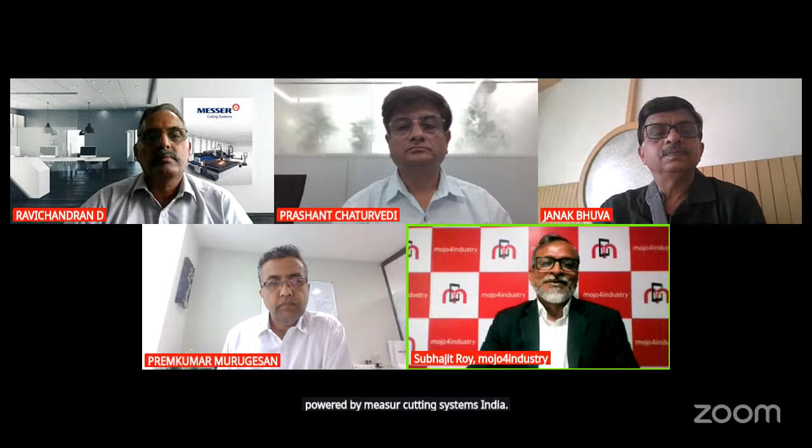One of the most important decisions influencing all these factors is the selection of the right plate cutting technology. Should you choose Oxyfuel? And when does plasma become the better option?

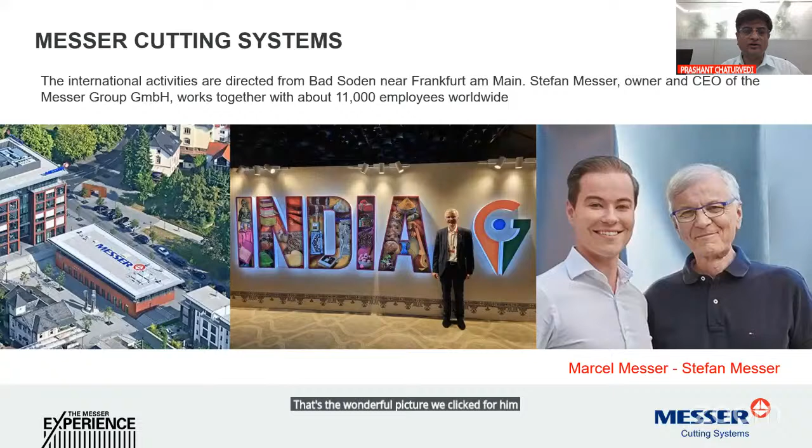This is how Cutting Systems is an owner-based company, presently owned by Mr. Stefan Messer. Last year, he was on invitation of the Prime Minister in India, and that's the wonderful picture we clicked for him. He came after a long period to India, and that's their office in Bad Soden.

As far as the world group of companies is considered, majorly they are a prominent player in China, Vietnam, North America in the industrial gases sector. Gases is one of the flagship companies with them, and they are into many industrial gases along with CO2 gas and many other related products, with many manufacturing locations and gas separation units worldwide.

Another company which the Group has is Spectron, which is into gas control systems - panels, high purity regulators, pipeline systems, and systems required for gas chromatography. This complete installation and high precision gas equipment range, generally called the high purity ranges, spans from industrial 4 purity up to 8 purity level of gases. All equipment and systems related to that are covered in Spectron.

Another division is what we call the OBU. Similarly, there is a US company called FlameTech, also owned by the group, primarily into the gas equipment business - regulators, torches, flashback arresters, heating torches, cutting systems, primarily based on gases. So the manual systems are covered under the OBU, and the US company for the same is FlameTech.

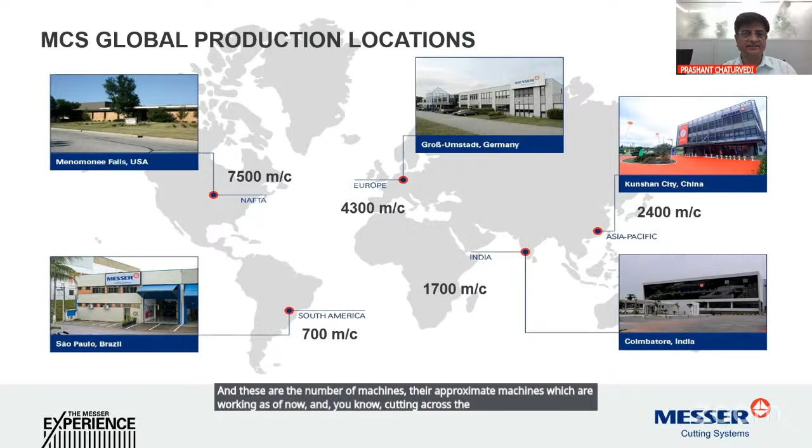And these are the number of machines. They are approximate machines which are working as of now, and cutting across the continents tons and tons of steel plates to make engineering components. There are wide dealer networks, service networks across the world which are placed.

And just a small story of MCS India operations: started in 2008, expansion in '10, another expansion in '11, and shifting to the new facility in 2013. And after that, another expansion into the laser plant, which was done in approximately 2017-18.

And I take this opportunity to extend a warm invitation to all of you. Recently, Subhajit has been to this plant, and I definitely vouch for that. In case you are traveling on a holiday to Ooty or you are on a business visit in Coimbatore, make a point that you have some 3 hours spare, and we would arrange a plant visit for you. And definitely you would be happy to see some systems and operations in place for this facility in Coimbatore.

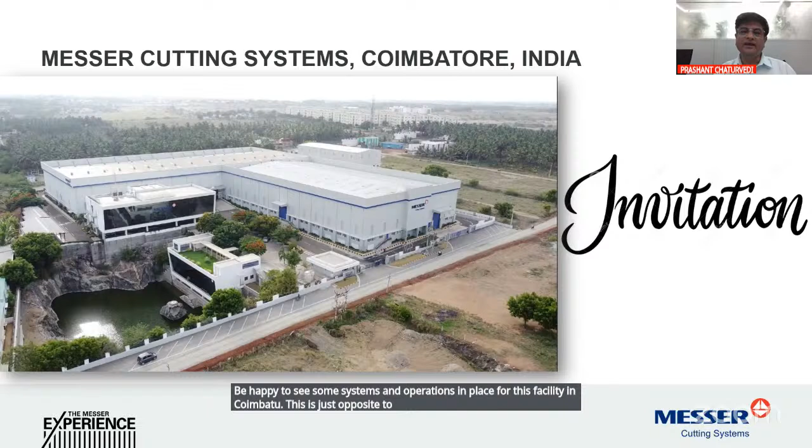This is just opposite the Larsen & Toubro Limited in the place called Malumichampatti. We have a complete gas cutting range as well under the same company, which is right from cutting torches, regulators, flashback arresters, gas nozzles, the gouging torches, the steel mill torches, and there are many more systems.

When you want to install, these days, the engineering companies do not want the gas cylinders. The gas cylinders that are the gases that we use in our plant, we call them, let us say, oxygen, acetylene, LPG, argon shield, nitrogen, helium, now hydrogen.

Even all these gases, the space the cylinder occupies is very important space in the plant. At the same time, there is a lot of movement of cylinders which inhibits the movement of the components. So as far as safety is considered, more and more people are opting that the gas cylinders be kept outside the plant into a controlled place.

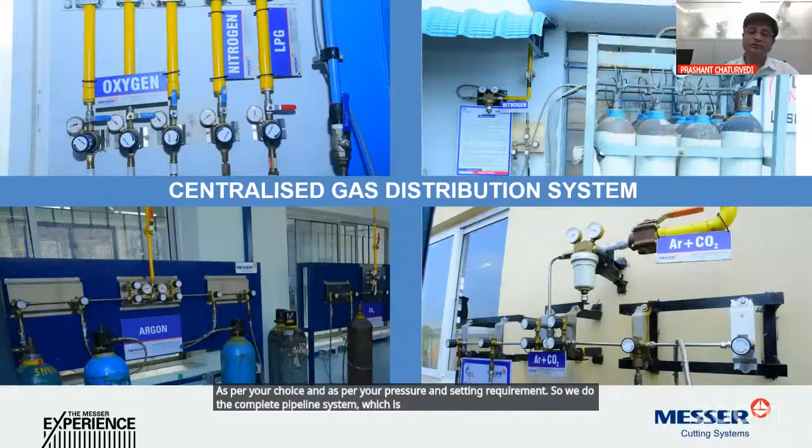At the same time, there would be a pipeline system running through the plant, and at the tapping points, you would be drawing the gases as per your choice and as per your pressure and setting requirement. So we do the complete pipeline system, which is an engineered one, along with all the safety process and regulations in place. There is a bunch of gas safety training programs that the organization, our team, conducts.

I strongly recommend that if you have these gases and equipment in your plant, engineering gases working, do write to any of the address or contact points in LinkedIn, website, email address that you have, and we would be happy to depute our expert trainers to conduct the free training program at your site or your plant. It's a very designed training program, and definitely will help you to increase the safety levels in your plant.

Gentlemen, now we come to the basics of the cutting process. We all know we have been seeing a cutting torch right across many decades or everywhere, right from a small street shop next to your place, which is doing maybe flame cutting. And then we have seen manual plasma cutting machines, and now we all talk of laser. In details, Mr. Ravichandran will take us through that.

But as you all know, in a gas cutting process, which we call the oxyfuel cutting process, it can be manual, the cutting torch that you see in the hands of a cutter or an operator, and you would see nozzles and a flame out of that nozzle. This flame would be either LPG and oxygen, or acetylene and oxygen. This flame is primarily used to heat the plate. Only MS can be cut by this process.

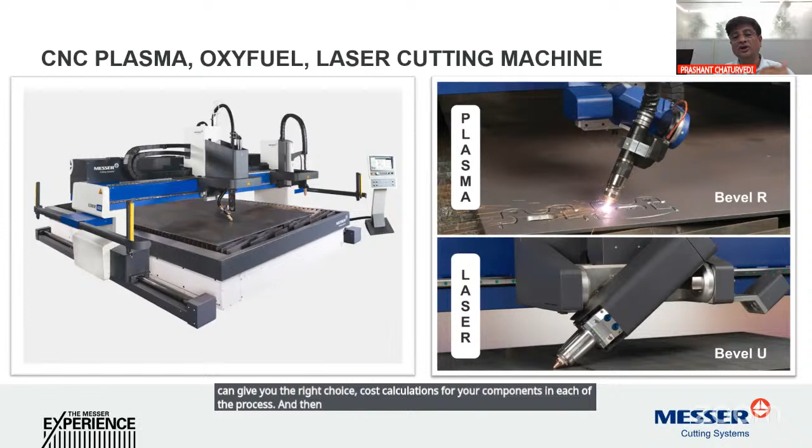So there are complete ranges, right from a small air blade which can cost 20 lakh rupees, up to the largest machine, as per your requirement, which can be given to you.

As we all know, in plasma, the basic one is air plasma. Then we enter the mid segment where we call it oxygen plasma, where we use oxygen as a plasma gas. And then comes high definition plasma, where we use mixed gases and the thickness increases, speed increases, and cut quality improves. These are high-end applications.

As far as plasma is concerned, we have two major partners for the plasma source, Hypertherm from USA and Kjellberg from Germany. So we provide the consumables, spares, and everything genuine required for this, along with the power sources as well, individually and along with our machines.

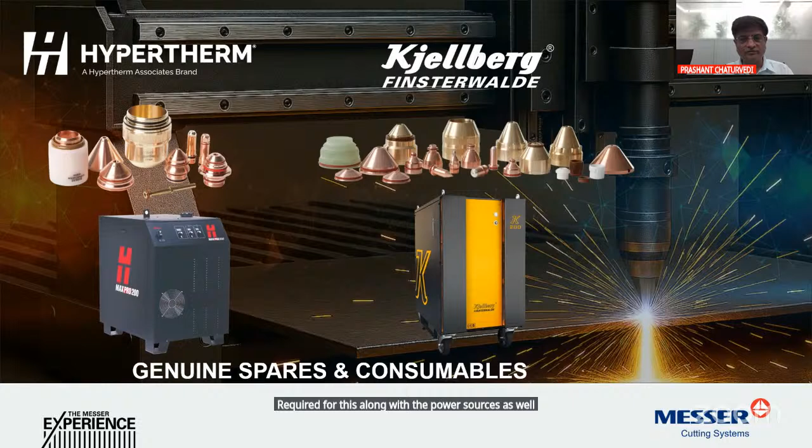We also do retrofit solutions, meaning you have an old machine, either Messer or some other make, but you don't want to discard that machine. You don't have capital budget, you only have revenue budget. So we can always work along with you and improve the productivity of this machine, improve the quality, change controllers, because many times the frame and everything are intact, so it can be upgraded.

Suppose you have used it for 6, 7, 10, or 12 years, and you feel it needs an upgrade in terms of productivity, quality of cut, or higher amperages, so the thickness capability can be improved.

All that can be done through our retrofit program. Just some similar examples we have done across. Every year we do approximately 30 to 50 old machine retrofits for our customers.

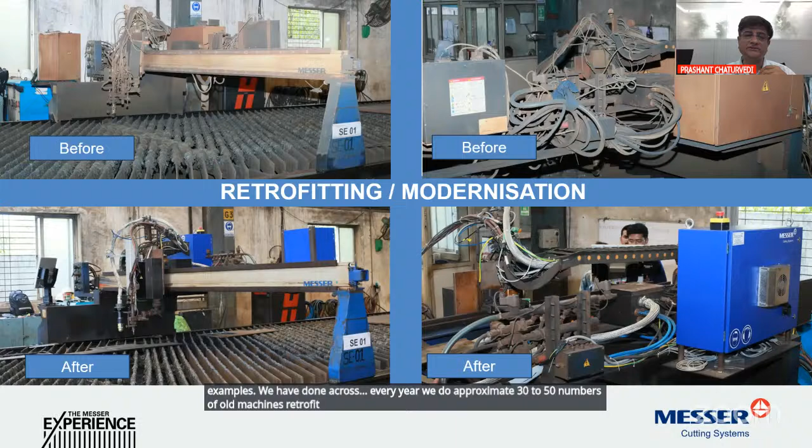Messer has a wide range of service teams, because these are mechanical systems working under harsh environments. The parts and components need continuous improvement or service. So we have AMC programs, service programs, retrofit programs, and a whole team along with our LCM managers who help you improve your performance and reduce your per meter cost of cut, improve your machine performance. Always do write to us.

If you still find that there is a gap somewhere, and you are already a Messer customer, do not hesitate, sir. Please write to us and we'll see that we correct ourselves and provide you the best services.

Just a few big names on the radar. Whatever I could include, we are humbled that we have all the major brands of the country, into big fabrication, on our customer list. And in the export region, since this region also covers the complete Middle East, we have many big names from the Middle East also as our esteemed and honorable clients.

So there is a relative selection of the process in terms of thickness, precision, cut quality. But I'll leave it here. From here onwards, Mr. Ravichandran will take you through the details of the process and how exactly we would do the selection. So thank you very much. This was my part. Over to you, Subhajit.

Thank you so much, Mr. Prashant, for introducing us to Messer Cutting Systems and sharing the company's vision of delivering advanced and diverse solutions to the industry. When I visited your facility not even 15 days back, I was thrilled to witness the work and R&D happening there, the employees, the resources. When I spoke to each individual working there, I found them thorough professionals. I'm really overwhelmed. Mr. Ravichandran was there too, so I could meet him. Thank you once again for the opportunity.

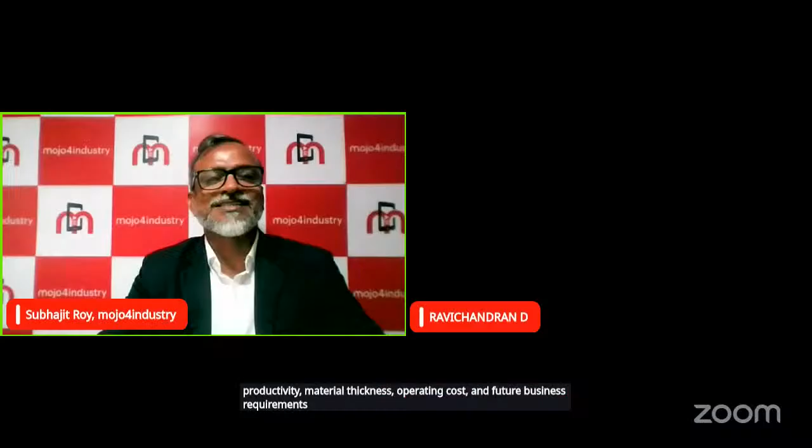So viewers, now that we have an understanding of what Messer does, let's move to the central theme of today's workshop: selecting the right cutting process is often a balancing act between quality, productivity, material thickness, operating cost, and future business requirements. To help us understand these critical selection parameters, we move to our next technical session.

Our next speaker is Mr. Ravichandran, DGM Application Engineering and ISD at Messer Cutting Systems India, who will speak on the topic of selection parameters between oxyfuel, plasma, and laser. Mr. Ravichandran has extensive experience in thermal cutting technologies and has worked closely with customers across various industries to identify the most suitable cutting solutions for their production requirements. In this session, he will compare the three major plate cutting technologies and discuss key decision-making factors. Please welcome Mr. Ravichandran.

You have to unmute yourself, sir. Yeah, sorry, right, thanks Subhajit. Thanks for the opportunity to express what is happening in the industry right now regarding thermal cutting technology. Let me share my screen. Please do that. It's visible, sir, you can go ahead. Okay, just a moment. Am I audible now? Yes, sir.

Yes, thanks again. I will talk about the three technologies, not on the working front, but about the benefits, limitations, and capabilities, so that gives you an understanding of what technology can be suited for each application, because the same application can have different parameters with which you view it. With the insight on the capability of the cutting technology, you can take a decision. Following that, I will also speak about the solutions Messer provides for each technology, and an overview of the products we offer for cutting.

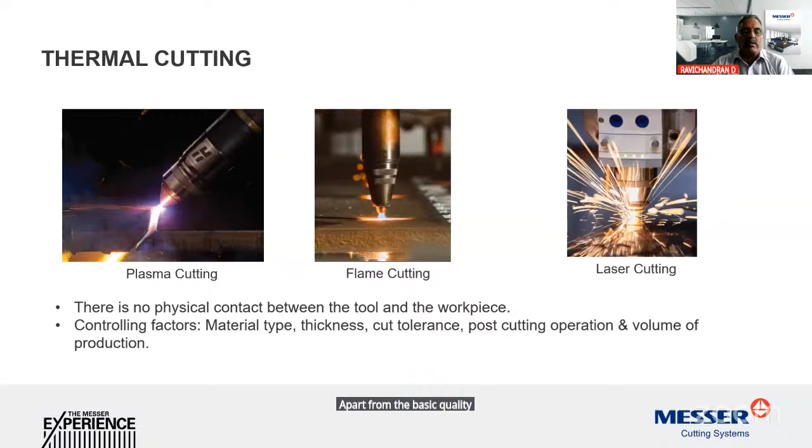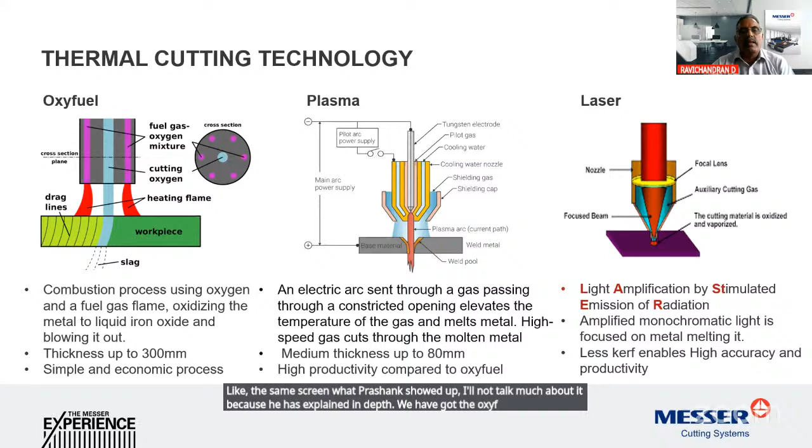Apart from the basic quality of each technology - like the same screen Prashant showed, I won't talk much about it since he's explained it in depth - we have oxyfuel, plasma, and laser. With oxyfuel, you can cut up to 300 mm, and in cases where you want more, we can go up to 450 mm.

When you cut closer, like if you have a hole, and the thickness of the material is 10 mm, you can only make a minimum 20 mm hole. When we talk of a minimum hole size, it means a perfect round surface can be achieved at a 1:2 ratio of the plate thickness.

Whereas in plasma, we can go up to 120 mm, and with very high definition plasma of 800 and 600 amps, we can cut up to 150 mm, but that will be a very edge cut. Generally up to 120 mm we can cut. The hole ratio is maximum 1:1, so if you have a 10 mm plate, we can make a minimum of 10 mm hole - that's even with high definition plasma, using a well-tuned and programmed machine that carries the plasma tool. So that's for plasma.

For laser, the hole ratio can be as low as 1:0.7, and in some rare cases it can go even lower. The thickness is restricted though, so maximum of 30 to 40 mm. The main advantage is fast cutting and low heat affected zone compared to oxyfuel. Plasma is still lower than oxyfuel, and laser is still lower than plasma. So these are the differences between the three cutting technologies.

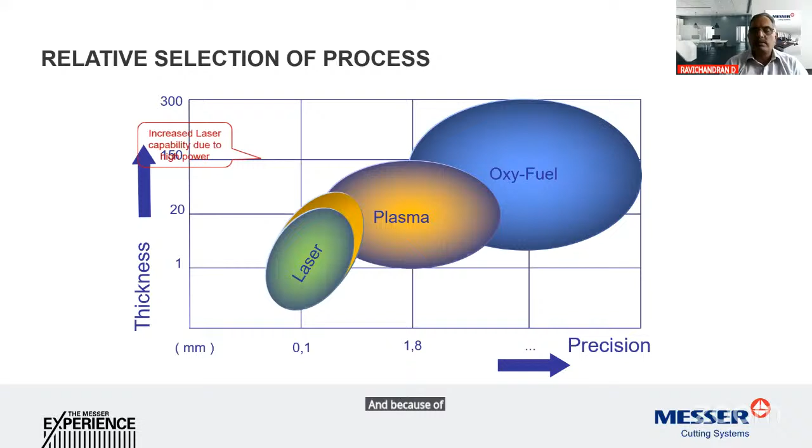What I mean by kerf is, when you have a plate and you cut it, the portion of material which is heated and blown away is called the kerf - the material we lose, which we don't have after we cut. That's on the kerf axis, on the thickness, on the top direction. So up to 25 mm you can have a better finish, and because of the advent of high powers, the laser still goes beyond that, up to 40 and 50 mm, but the quality is not as good as at 25 mm. That's why we've put a different color to that.

So it's developing fast - laser is fast developing when you compare the technology with plasma. Oxyfuel is already a proven technology, and not much development is happening on that.

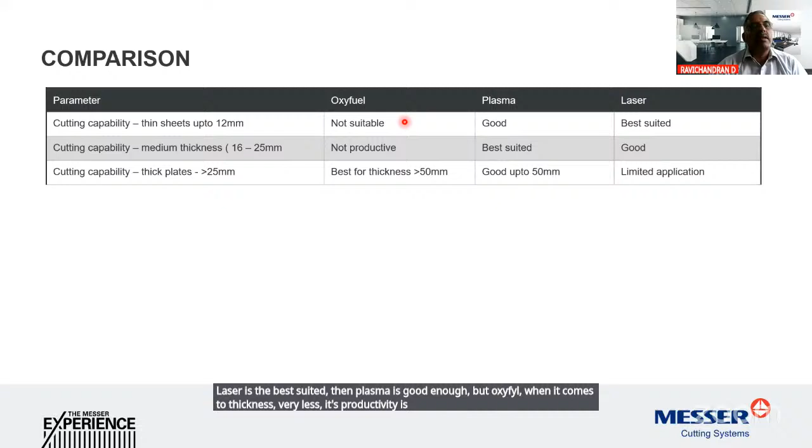Now comparing in terms of cutting capability: for thin sheets up to 12 mm, laser is the best suited - I'll just put a laser pointer. Laser is best suited, plasma is good enough, but oxyfuel's productivity isn't there when thickness is very low. When thickness is from 16 to 25 mm, plasma is best suited, laser is also good, but oxyfuel is still not productive. Above 25 or after 50 mm, oxyfuel is the best solution, plasma is good, but laser has very limited application.

So only up to 25, laser is good. This is the mantra in terms of capability of the technologies.

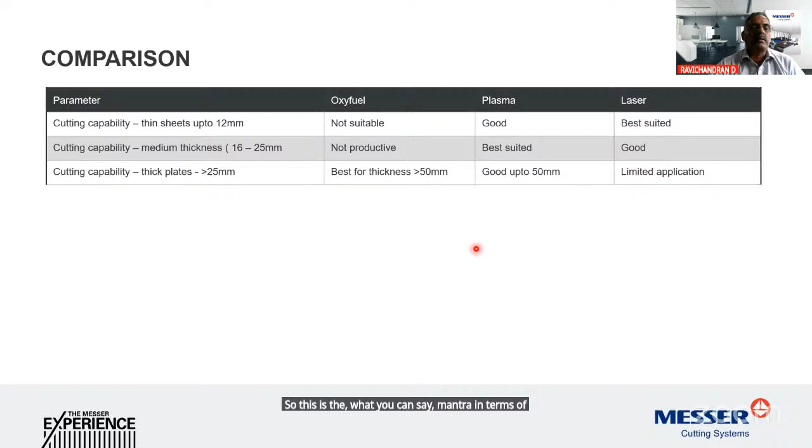Then the kerf, like I told you, for Oxyfuel we go up to 3 to 6 mm, whereas in plasma it's maximum 4 mm, even when you go for higher thickness. But laser is 0.1 to 0.5. It means more accurate, moderate, and less accurate. That's how we can define it.

And edge quality is good for plates up to 16. Good finish, very good surface finish, but a slight taper is there, which I will explain in the forthcoming, where the taper is also divided into 3 types of plasmas. So I will talk to you about that.

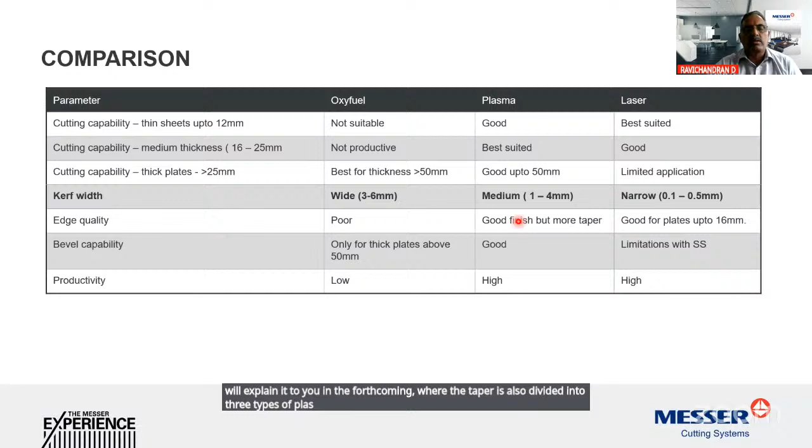And here edge quality is poor, meaning it will be straight, but still on the corners it will have a glowing effect. And bevel capability,

good with plasma, limited with laser, because we have limitations with stainless steel.

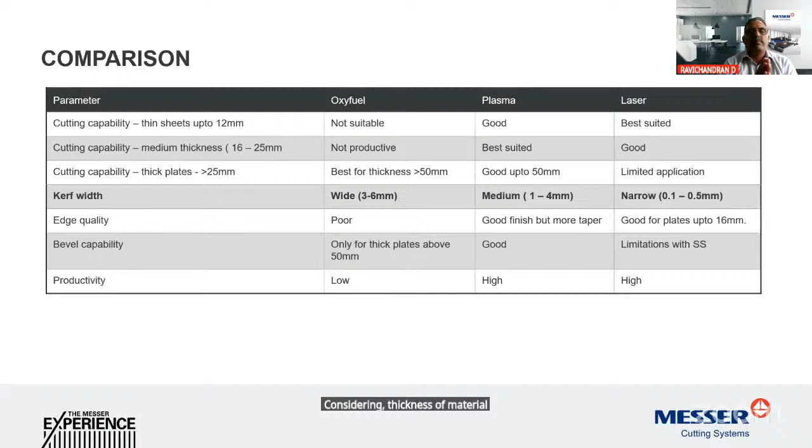Then coming to productivity, Oxyfuel is very low because the cutting speeds are low. Plasma is high, laser is high, but considering the thickness of the material, if the plate thickness is a bit higher than 10 or 16 mm, then plasma is the only technology which can cut material at high speed so that productivity is increased.

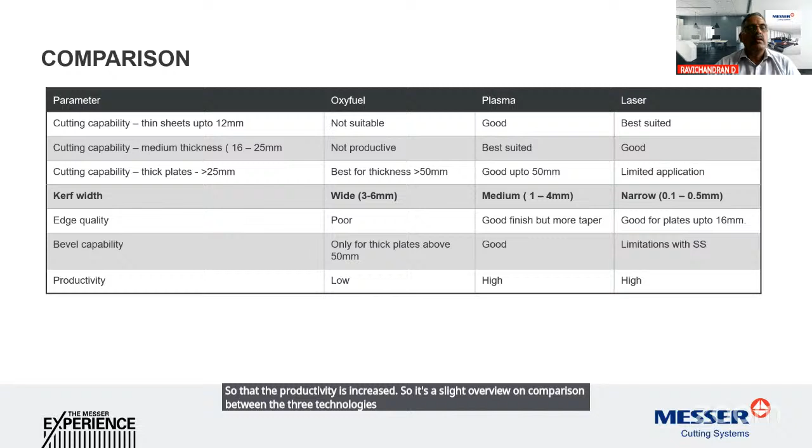So that's a slight overview on comparison between the three technologies. Now I will talk to you on specific cutting capability, cutting speed, and productivity across different technologies.

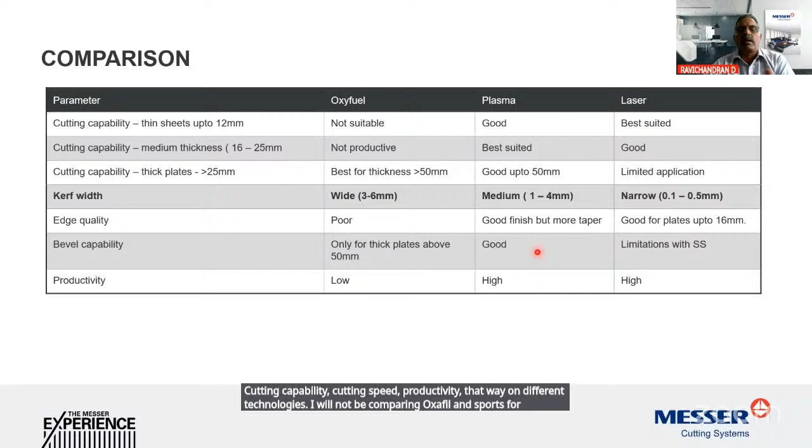I will not be comparing Oxyfuel henceforth for each comparison, because when you have a thick plate thicker than 50 mm, it's best to cut with Oxyfuel only. So most of the comparison happens when you have a plate cutting between 16 mm and 50 mm. That's where we want to have a real comparison, so I'll be mostly comparing plasma and laser, since those are the faster, high productive technologies used for cutting.

I have classified plasma into air plasma, oxygen plasma, and high definition plasma. That's how plasmas are classified, by virtue of how they are cut, what type of gas they use, and the technology. So we have got three types of plasmas.

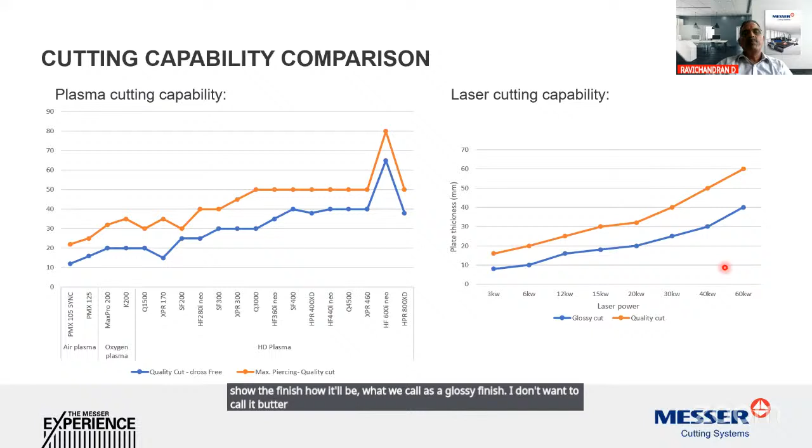And then when you go beyond that, maybe 40 or 60, which I think in India we have never experienced. Maybe this year we will be introducing the 40 and the 60. In that case, we can go up to 30 and 40 mm on a butter finish. I'll show the finish, what we call a glossy finish.

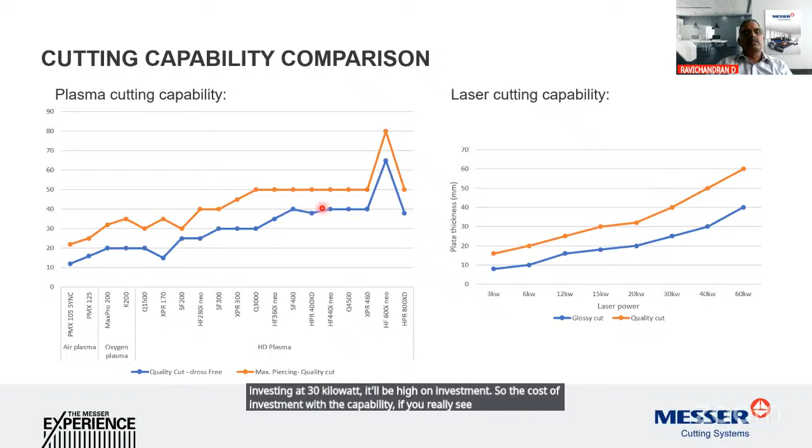I don't want to call it butter finish, but it's a glossy finish, more similar to plasma. But beyond that, whatever you cut in this area will have feed marks, but acceptable. There will not be any surface variation. So it's good, but still, when you want 25 mm and invest in a 30 kilowatt, it will be high on investment. So the cost of investment versus capability, if you really see, plasma is good for applications up to 25 to 50 mm, whereas here it's good up to 10 or 20 mm thick cutting.

But as the thickness goes beyond 6, to 10, both are similar from 10 to 16 - plasma and laser are similar to each other. When you increase the laser power, it matches with plasma. And beyond 20 mm, plasma is more productive.

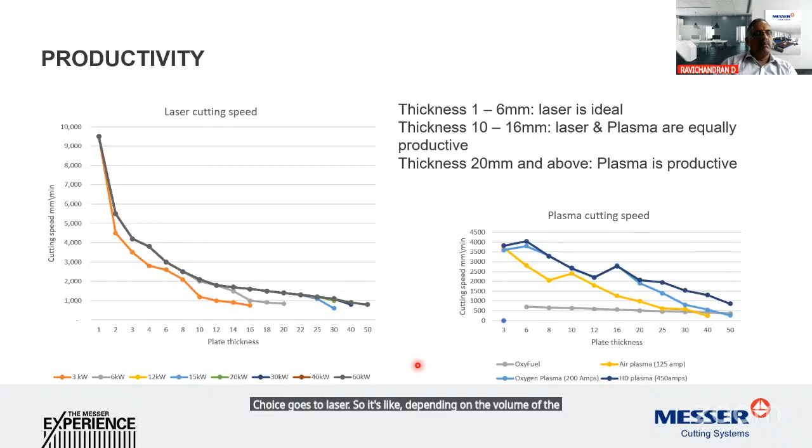So now coming to individual capability, finish-wise in laser - I've told you this is the maximum quality cut, and this is the maximum cut. So generally people will not cut in this segment, so whatever we are interested in is below this segment. So if you have a 20 kilowatt, I'm typically talking about mild steel cutting with oxygen.

We have two types of cutting technology for mild steel - one is generally oxygen, and since the high powers have come, now cutting with air is also taking popularity, so I will explain that too. But if you want a good finish, below this blue color line the finish will be glossy, with no feed lines - it will be very smooth. But beyond this, up to the quality cut, you will have visible feed lines, but the surface will still be smooth.

The taper will be within 1 to 1.5 degrees, or 2 degrees maximum. Beyond that is the maximum cut, where you have deep feed marks and a rough surface, which is not a desired cutting quality. So we should always look at whether you need a glossy finish or just a quality cut which can be used for fabrication. So this is how the cutting capability of mild steel with oxygen works.

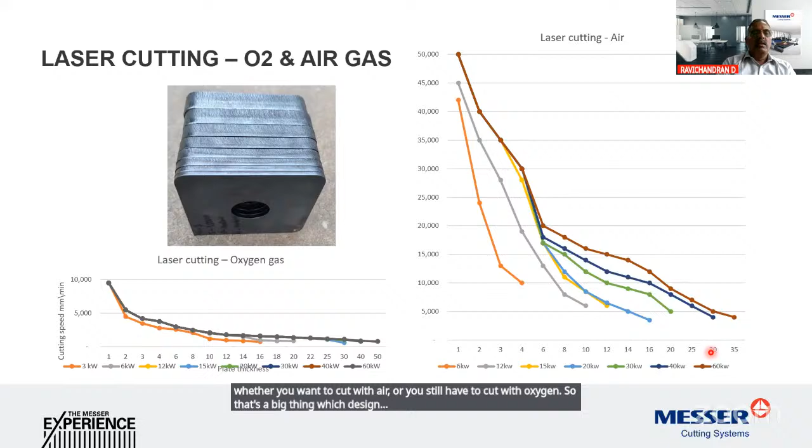But since you are going to use higher power to cut a lower thickness, your investment has to be higher upfront. But since the productivity increases, the ROI can be justified. So it all depends on the volume of production and the quality of the cut you need. That only decides whether you want to cut with air or you still have to cut with oxygen. So that's a big deciding factor if you want to cut with laser.

But this is a very coarse cutting. The quality cutting will be 40 mm for 300 amps and 50 mm for 450 amps high definition plasma.

And if you really see, the best part of plasma cutting is you have a smooth surface without any visible feed lines. But still, the kerf will be 1 mm, 1.2 mm to 3 mm for generally used thickness, and for maximum thickness it will be 4 mm. The volume of material blown out is higher, so what happens is on the edges, the bottom of the edges will be slightly rounded. That's the only disadvantage, but still the cutting quality will be good - the surface will be smooth.

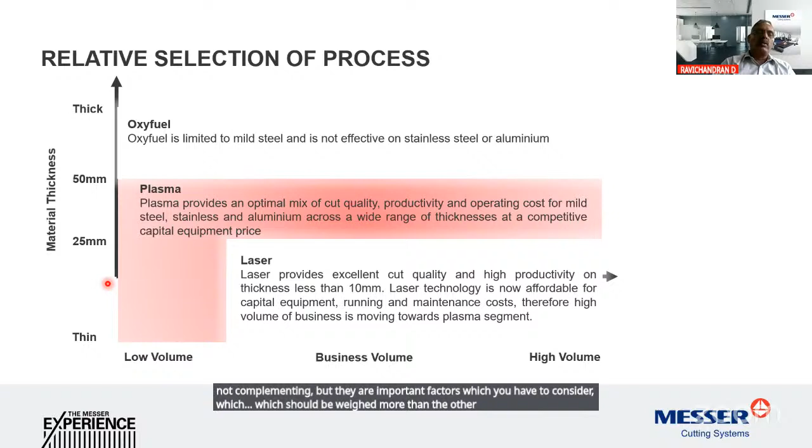On a relative selection, when you have thick plate cutting, there is nothing to dispute about - oxyfuel is the best solution. When you have plates from 25 to 50mm, it's better to have plasma. From up to 25mm, if up to 10 or 12mm, laser is a better solution. From 10 to 25mm, you can have a mix of either laser or plasma, because the justification depends on the productivity, the quality you aim for, or the investment you want to make upfront. All these factors are important and should be weighed against each other to decide on the process to be selected.

Laser is actually slowly dominating the market, but still, to give you an insight on the advantages of plasma over oxyfuel and laser, I'm just putting a few points to remind you of the benefits of plasma.

Plasma always has a better cut quality, and productivity is higher. The cutting speeds are anywhere between 2.5 meters per minute to 4.5 meters per minute, with lower cost per length cut compared to oxyfuel.

When you consider against laser, again, plasma has higher productivity for thick plates - say 10, 16, 20, 25mm - productivity is higher than laser. Using the same torch, plasma gives you a wide range of applications. Considering the investment, plasma's investment is lower, at least 1/3 the investment of laser. So there's lower capital demand for plasma but higher productivity.

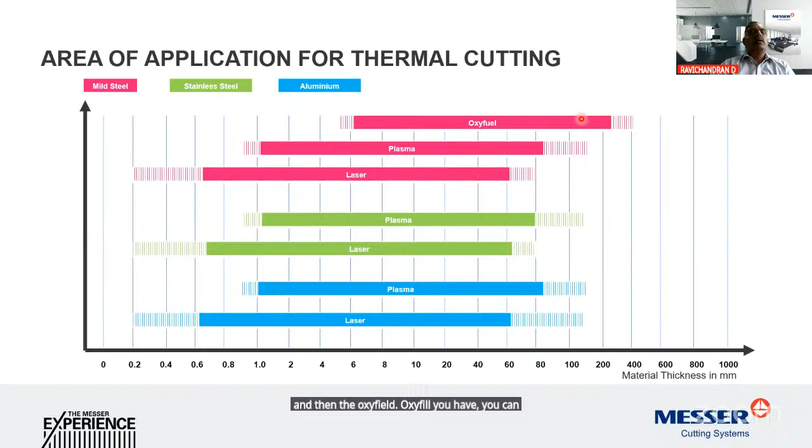Between plasma and laser, how do we choose? One factor is the workpiece or plates you want to cut, the part or output you want to get. If it has simple lines - if you're just cutting a square with 4 corner holes or something, or just making a cutout - then it's simple cutting, plasma is better. When stricter tolerances are there, small holes have to be made, when you consider plate-to-hole ratios to be very small and precise with intricate surfaces, then laser cutting is better. Thickness-wise, for more than 25mm, 30, 40mm, plasma is the best solution.

When you have thinner plates up to 6 or 10mm, then laser is the best solution. If you have a slot or inner contour, laser is better. Whereas if the quality of the inner slots doesn't need to be as good, then plasma is a better solution.

For reflective materials like stainless steel or aluminum, plasma doesn't have any effect - whereas with laser you have back reflection hitting the laser, so you have to be very conscious while cutting reflective material. But that's not the case with plasma, which doesn't have any effect when cutting reflective material.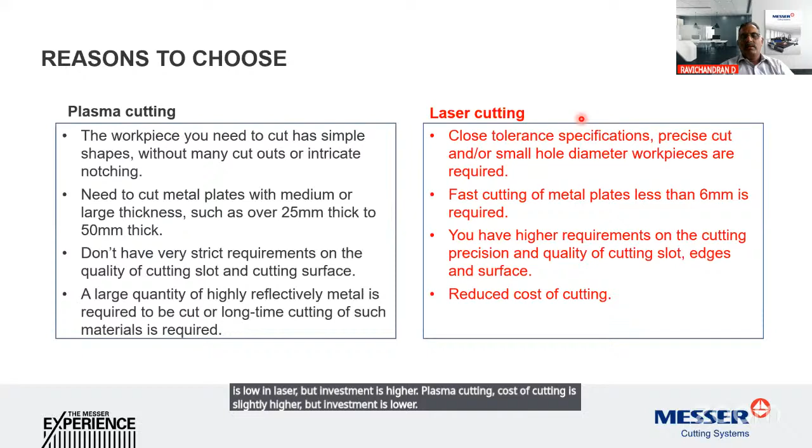Cost of cutting is low with laser, but investment is higher. With plasma cutting, cost of cutting is slightly higher, but investment is lower. So this way and that way, the technology works - these are the pros and cons.

Oxyfuel advantage: straight edge cutting, and for higher thickness it's better to use oxyfuel. Without piercing, it's better for edge cutting. Disadvantage: it's only used for mild steel - you cannot cut stainless steel, aluminum, or other non-ferrous materials. And it has very slow speeds.

Cutting is nothing more than 500 millimeters per minute. Normally it will be 150 to 250 when you cut higher thickness. If you're cutting thin material, say 3mm or so, it will warp because more heat is generated, so the heat affected zone on the plate is also more.

Considering plasma, it can cut all electrically conductive materials - we don't talk about any non-conductive material here, we're only talking about steel, so mostly these are all electrically conductive. And cutting speeds are higher.

Then ability to cut higher thickness also. Disadvantages: the kerf is slightly wider. So just if you see, this is the kerf.

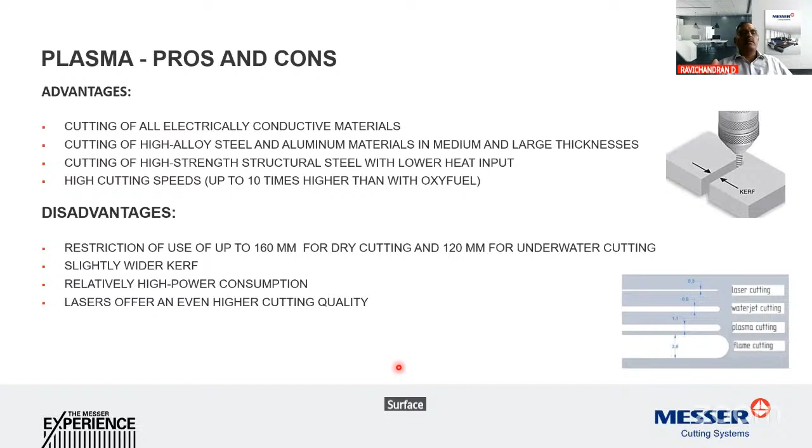This is what you get for oxyfuel, and then this is plasma, 1.2 to 1.8. Then laser is very thin, 0.2 to 0.4. Sometimes for higher thickness you get 0.5. So higher power consumption, because the power is used to ionize the gas, which in turn is going to cut the material.

So power consumption is slightly higher, and surface quality is always better for laser. And then for laser, advantage is when you want high precision or clean cuts, laser is good. And minimum kerf, so material or plate utilization is better than the other two technologies.

Disadvantages: when you have a demand to cut thicker material, it's really tough. And then it's more sensitive. Laser cutting is more sensitive. What it means is many factors like the power, the speed, the gas pressure, flow, then purity of gas, then the cleanliness of the optics, and the exhaust system where you take off the fumes. Everything has to be good.

And all the other factors, like what I told - the power, speed, gas pressure, gas flow, purity - and more than that, the focus length, height, all those, and the composition of the material also. All these play an important role on the cutting quality and speed, and they are more dependent on each other.

So it's not like you just reduce the air pressure or increase the air pressure and the cutting will be better. It's not that way - you change one parameter, then you have to fine tune all the other parameters. So that's a big disadvantage when you consider laser. That is not so with plasma and

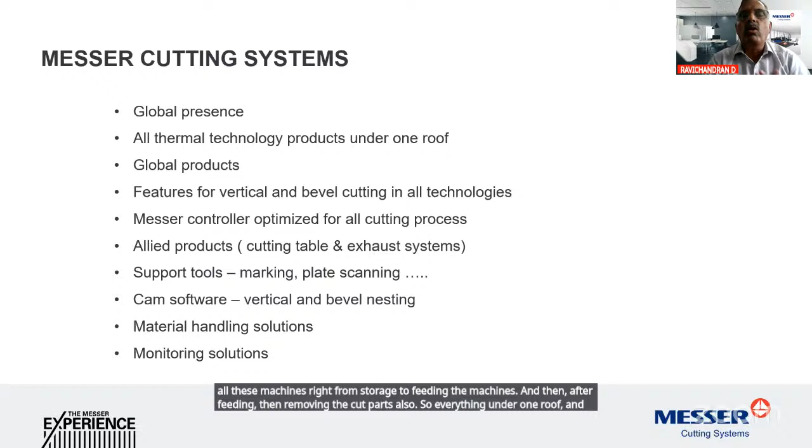Now, I talked a lot about the technology, and I will breeze through the products where these technologies are used. So first, we have the plasma and Oxyfuel machines. The lineup is like from air plasma up to a high definition plasma.

Air plasma is where you have a cutting taper of around 3 to 5 degrees. Those are mainly used for areas where the taper doesn't affect you much, and you don't have to invest more.

Like the PEB industry, and then for the fabrication industry, where the edges are not so important. So the starting is our Smart Blade, which is a machine typically made for ducting application. It's 3 meters by 1.5 meters, a drop and cut machine which can be taken to places where we have to manufacture the ducts.

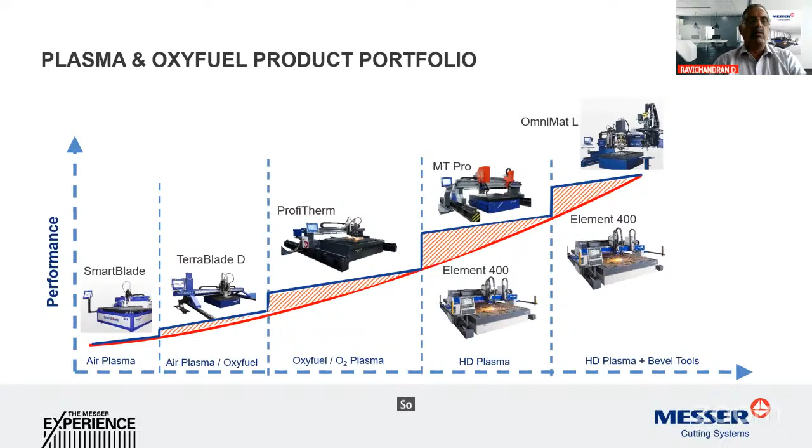Then the Terra Blade, then the ProfiTherm, then the high definition plasma used machines like the Sonic and the Element. So just to have one slide on each machine.

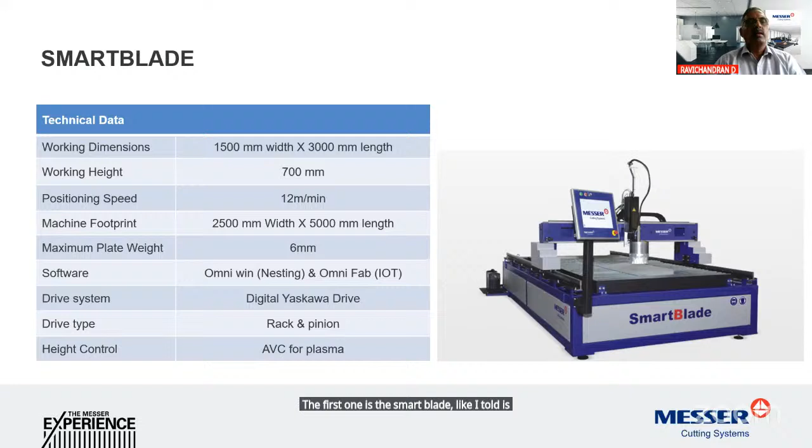The first one is the Smart Blade, like I told, this duct cutting machine. The next one is the Terra Blade for the air plasma application. Very limited sizes, cutting lengths of around 13 meters maximum, width of around 2.5 to 3 meters can be cut in this. Only plasmas up to 150 amps can be used.

So mainly this is suited for air plasma. Then the next is the ProfiTherm. This is, I would say, more suited for the fabrication industry, not heavy fabrication. Here you can use plasmas up to 200 amps, mostly the air plasmas, and also a few high definition plasmas.

So we have machines - these are more configurable machines. All our machines are highly configurable. You can have a cutting width from 3 meters up to 5 meters, and lengths anywhere from 6 meters up to 30 to 32 meters.

So you have a table, you can have a plate in the front where you cut. At the back, you have a plate which is already cut, where people can remove the cut parts and put a fresh plate. These machines are that type. This ProfiTherm is for applications up to 200 amps.

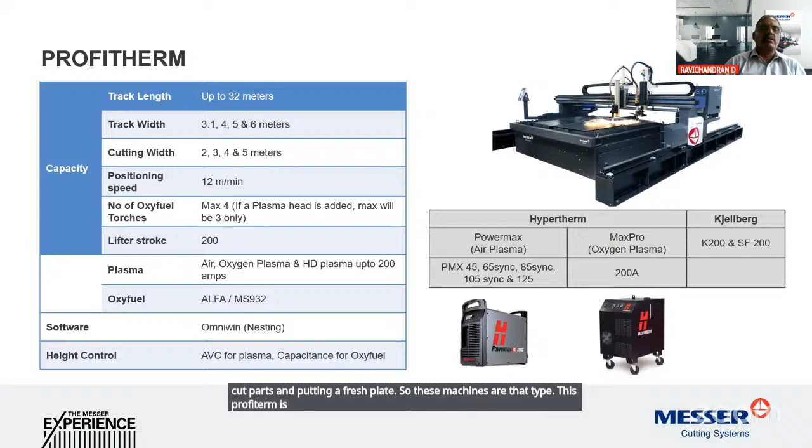The next one is the Sonic Pro. Here is a machine which has got cutting capability up to 460 amps and 600 amps also. Again, the same way, cutting widths up to 5 meters and lengths up to 32 meters.

And then comes our flagship machine of the non-laser machine. This is our Element 400, which is a high-speed machine with two configurations, either a maximum speed of 24 or 50 meters per minute positioning speed. So either way, we can use this machine.

All tools are available in this machine. We can use up to high definition plasmas. Then you can have the plasma bevel, not the non-TCP alone - we can have the TCP bevel also. And then we can have all markers - plasma marker, inkjet marker, pin marker can be used. Width is up to 7 meters and length up to 45 meters can be had in this machine.

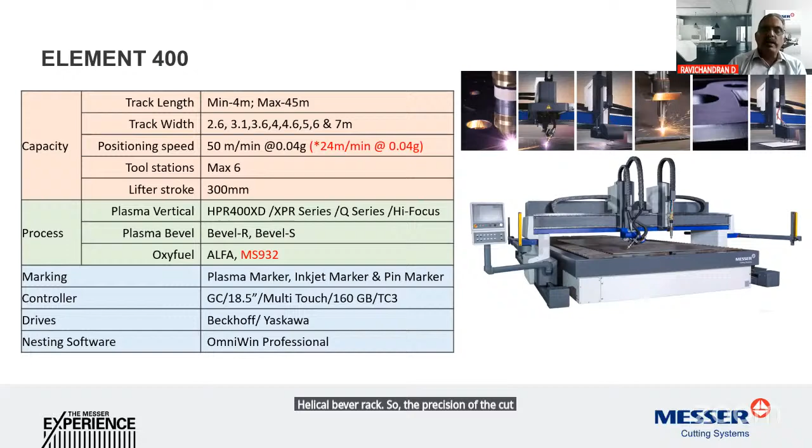And this machine typically has a helical bevel rack, so the precision of the cut parts is much better and the quality is much better.

So just to have a look at the video of the machine. This is the machine, with all safety included.

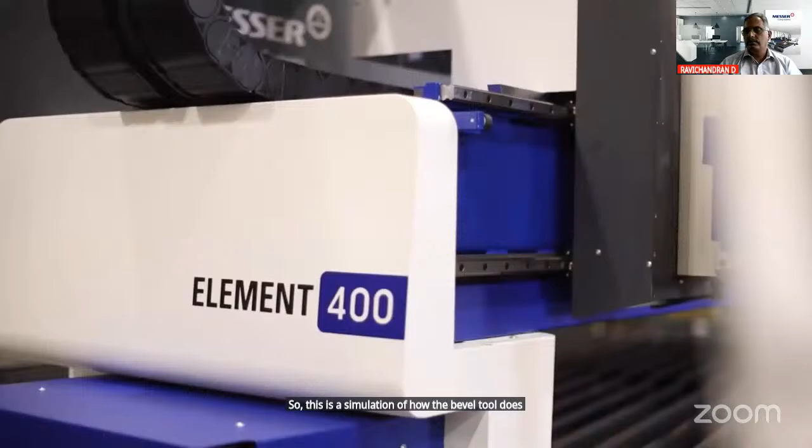So this is the last one. This is a simulation of how the bevel tool runs. This can be used for Oxyfuel and plasma.

I'm just moving it forward. So in this we have a manual bevel for the longitudinal transverse direction, and we can have the contour beveling application also, wherein we can bevel up to 45 degrees.

One thing is we can change the bevel while cutting also, so you can vary the bevel on the fly. That's an important thing which is not available in many competitors.

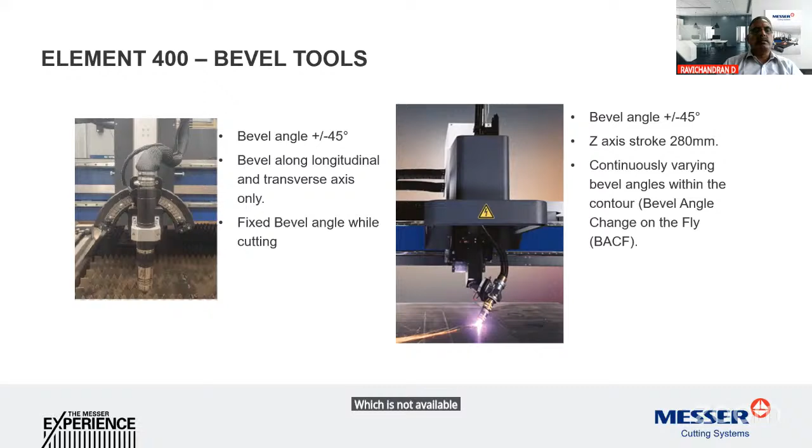I'll just run for a few seconds and then I will skip it. Generally we have a protective suit to safeguard the operator's life. We have just removed it to show how it works.

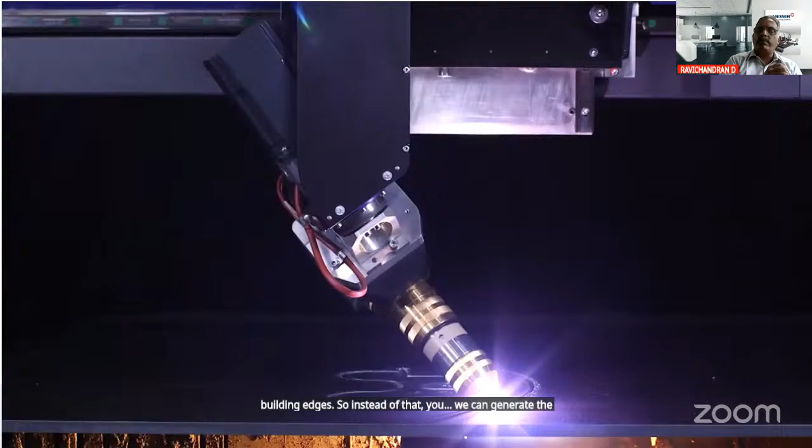So this is a TCP bevel. Your bevel quality and the accuracy of bevel increases. The advantage of this is whenever you have a weld preparation, generally you start with a heavy fabrication, you cut the part and then take it to another work center where you create the welding edges. Instead of that, we can generate the weld preparation right there while you cut it. So the time for cutting is reduced, and you don't have to have a secondary operation.

Then plasma options like Hypertherm or Kjellberg. This is all about the plasma portfolio. Then we have the laser product portfolio.

So we have got two types of offerings with laser: one is the standard format laser machines, and then the large format. Standard format laser machines are for cutting plates up to 3 meters by 1.5, up to 6.5 by 2.5. That's what we get in India.

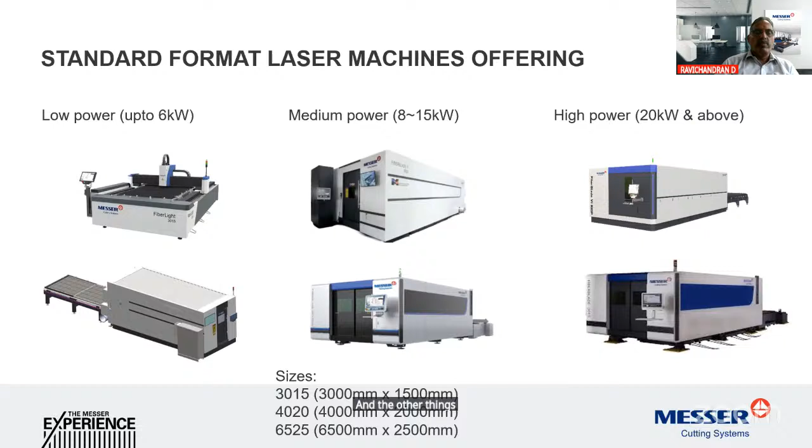So we have got three types of machines: low power, medium power, and high power. Low power machines can handle up to 6 kilowatt. The other one is 8 to 15 kilowatt. And the high power is 20 kilowatt and above, so 30, 40, or 60. Only on the low power do we have a single table machine, and the other ones are all enclosed and safe from radiation.

So low power is a bit deep dive into the specification. We have the machines of 3 meters by 1.5, 4 meters by 2 meters, and 6.5 by 2.5 meters. And plate thickness capability will be up to 25 mm. That's why we say this can be used up to 6 kilowatt.

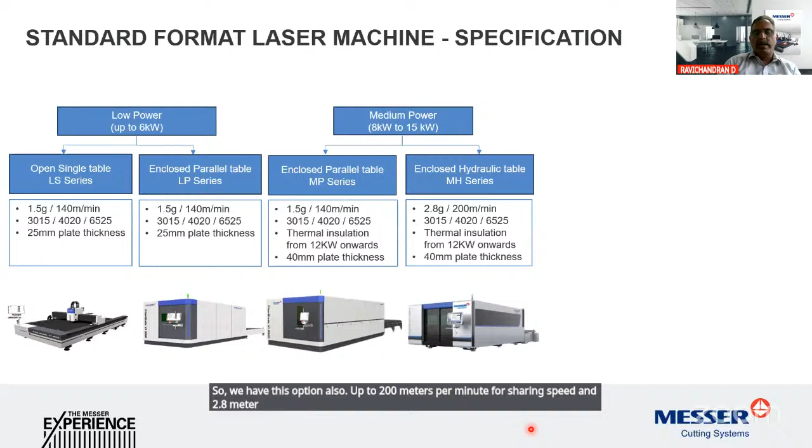The other one, mid power, is the same sizes, but the application will be up to 40 mm plate thickness. So it's a more sturdy machine. And we have two options wherein we can have an increased acceleration and increased speed also, up to 200 meters per minute positioning speed and 2.8 meter G rapid maximum accelerations on simultaneous. And then the high power, similarly here also.

But two major differences: the plate holding capacity is still higher, 60 mm. And these machines will have thermal insulations because when you are cutting at high power, heat generation is more, which tends to heat up the body structure. So that's the insulation which separates the body structure from the cutting zone, so the stability of the machine structure is not affected at all. That thermal insulation is available with the high power machine.

So these are the three various categories with the sizes on the standard format. Then a small video to show you how it looks like. I'll just run for five seconds and then take you to the next product.

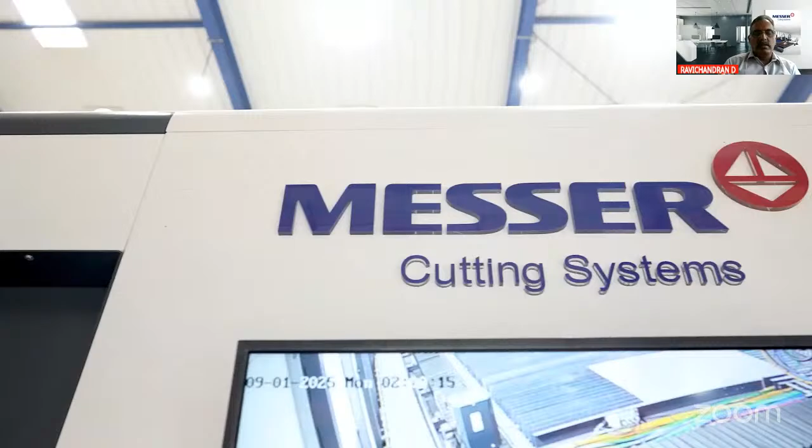So you have a machine fully enclosed. Then you have the shuttle table, various shuttle tables which take the minimum time for exchange. And in our laser machine, we have lasers of IPG, and others. And on the cutting head front also you have those options.

So I'll just run through. Large format is the next type of machines where we talk about cutting large sizes of plates. On the standard format, we have maximum plates of 3 meters by 1.5, 4 meters by 2 meters, and 6.5 meters by 2.5 meters. But for large format, if the cutting width or the plates to be cut are 2.5 meters and above, or the cutting length has to be 6.5 meters and above, we have bigger machines which we call the large format.

In the large format, we have got three types of machines. One is the fixed type, where the cutting width can go up to 4 meters and the cutting length can go up to 28 meters. So you have a fixed table where plates are kept put and you do the cutting, and laser powers can be up to 60 kilo.

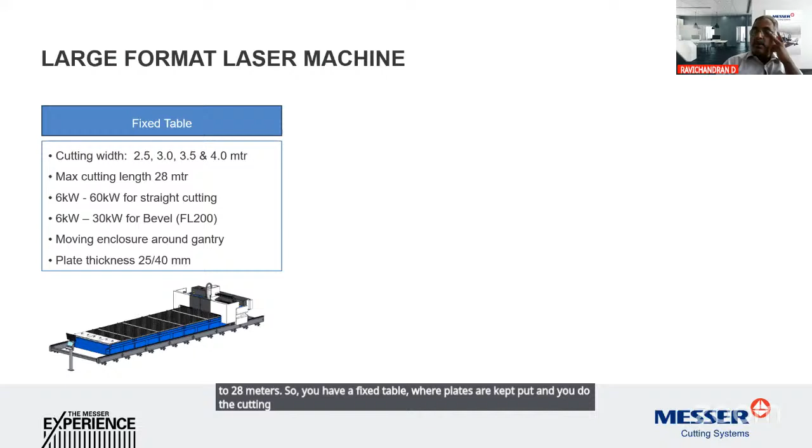And the next variant is, especially in the fixed table, you have a localized enclosure, which I will show in the next coming slides. And for parallel exchange table, it's like you have a shuttle table, but for a longer length than the standard format length, for 8 meters and 13 meters, and which can be from 2.5 and 3 meters. So you have a parallel exchange and a hydraulic exchange also.

One major thing is in these two machines, we can do beveling with laser also. That's a big thing because earlier what I told was on the plasma. Here we can do beveling with laser also. So this is a video for the large format.

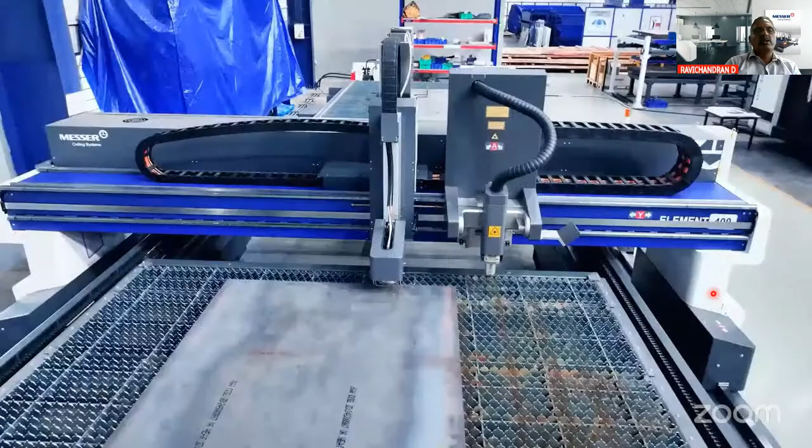We have not put the enclosure so that we can give you a better idea. This machine, whatever we are showing, that's our global controller.

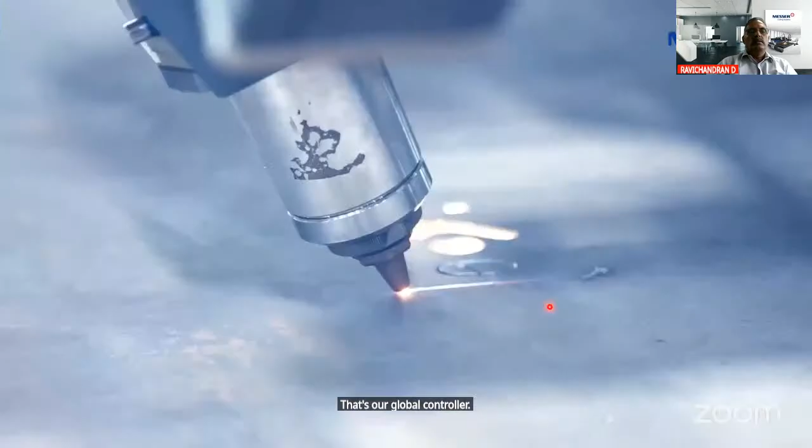I'm just skipping this and going on to explain the enclosures. So when you have a fixed table, we have two types of enclosures. One is for vertical cutting, which will be very compact.

And when you have a bevel, your tool is going to move around and then you need more space. So you have a bigger enclosure which also moves along with the gantry while you cut. And when you have a shuttle table, the whole cutting area is enclosed. So we have three choices of enclosure for the machines, which can be considered based on the investment also.

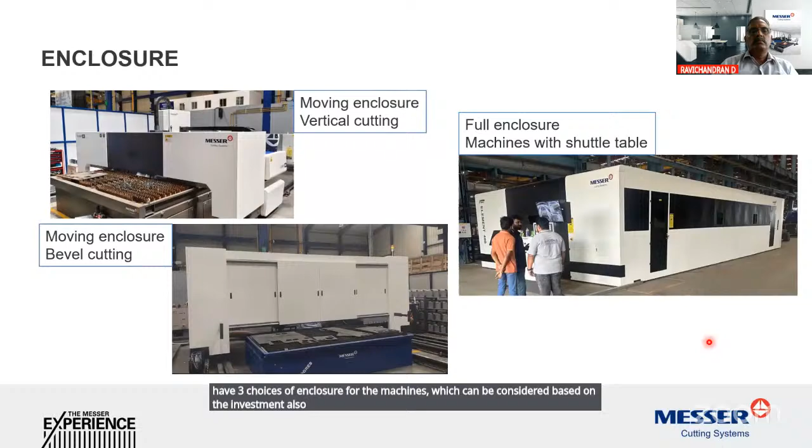And next important thing is the laser beveling. Here, what we proudly boast to say is our bevel tool cuts up to 50 degrees, whereas all the bevel tools across the world cut maximum up to 45 degrees. Ours cut up to 50 degrees, plus or minus 50 degrees.

And this is the cut quality what you have seen. I don't want to talk much about this, so this is a video to show how it cuts.

So this is beveling with laser. What happens is minimum wastage of material and accurate beveling can be achieved. This is particularly for mild steel. We have challenges with stainless steel where the limitations are there because of the pressure of gas being used. Higher the pressure, we will not be able to get a better edge quality during beveling.

So this is to just showcase the cutting capability. When you cut with oxygen, you get the glossy finish I was telling about. And then for quality cut, you will have some feed marks. You can see some feed marks, slightly feel it, but the surface is good.

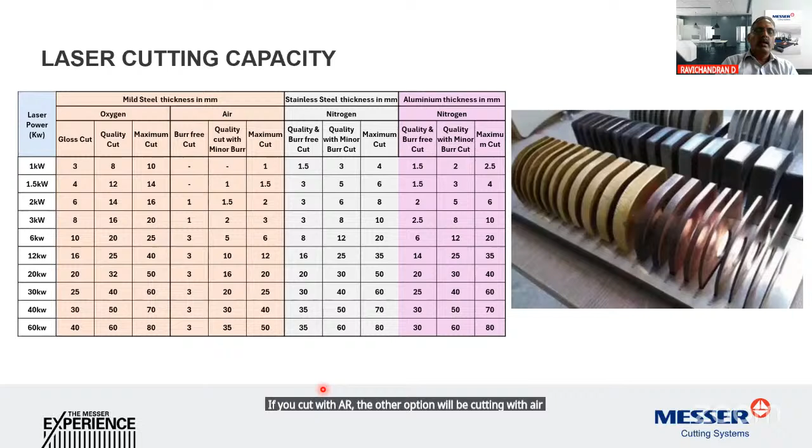Mild steel you can cut with oxygen and also with air. Stainless steel is better to cut only with nitrogen, and aluminum also with nitrogen, because if you cut with air, oxidation will happen on the cut surface. So this is the quality of cutting with oxygen.

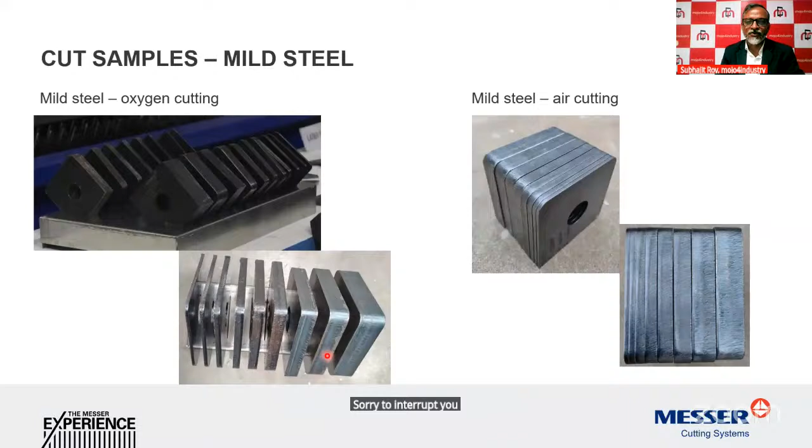Sorry to interrupt you, sir, could you quickly sum it up, because we have Mr. Janak also in pipeline. Okay, two minutes.

So all our machines are controlled by the Global Control, wherein we have the best thing. One important feature is job queuing, wherein we prepare everything and keep it ready, and the operator has to just press the start button to perform the next operation. So these are all about our plasma and laser cutting machine.

I would just want to not talk about the material handling, because this session is mainly on the cutting technology. Thank you.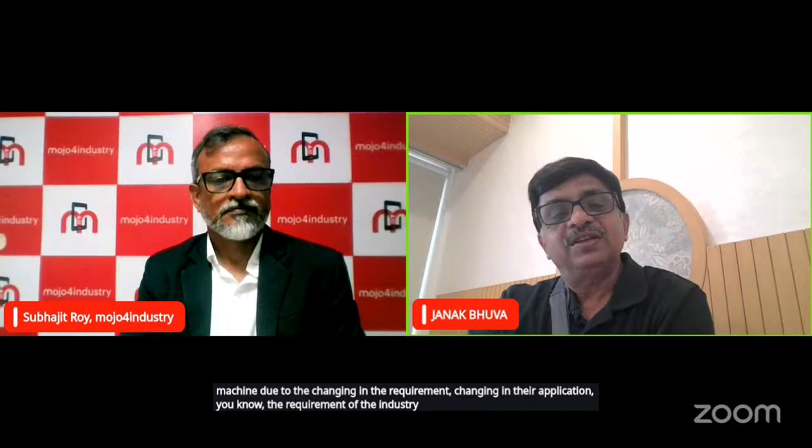This particular laser cutting machine is 12 kilowatt with a shuttle table of about 2.5 by 8 meters. They are mainly in crane manufacture and construction equipment machinery, and they can cut thickness up to about 22mm. Their profiles are mostly suited for laser application.

An interesting point: it's not that plasma is out and laser is the only option, or laser is out and plasma remains. This customer placed the order for both plasma and laser together. So you can understand how they select the machine for their application. Some components of their overall product go to the laser, and some go to the plasma, then they combine both to produce their product. That's how they go about it.

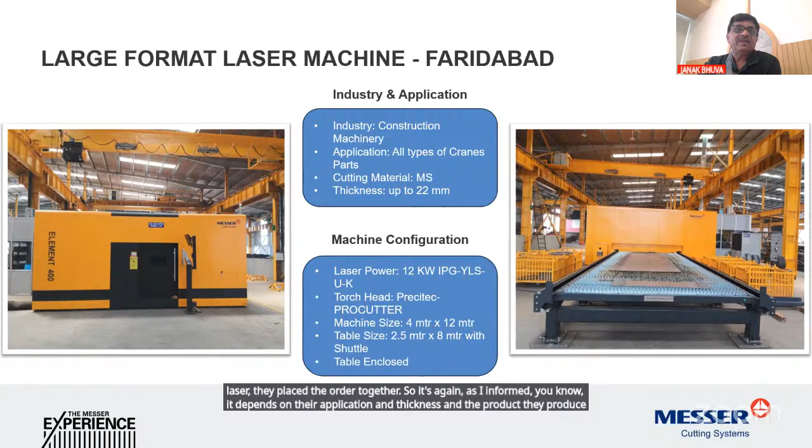So yeah, perfect sir, that was the machine I was talking about. This particular installation is at Edge Construction, Faridabad, and as I told you, this customer was having 7 plasma machines from us. This 8th plasma and the first laser they placed the order for together. So again, depending on their application, thickness, and the product they produce, they select the cutting process.

This is another example, in Ahmedabad. This customer is also my 20-year-old customer. Their name earlier was Gujarat Apollo, now it's Ammann Apollo in Mehsana, and they were using our plasma cutting machines since 2005-06, all high definition plasma. Recently, in spite of having the plasma, they installed a laser cutting machine for new industry requirements and some export orders where the outside cutting profile gets exposed and they don't want any rework.

They can directly use the laser output. So now they have 4 plasma and 1 laser. They use both as per requirement: lower thickness, export jobs needing quality, accuracy, or small holes less than plate thickness go to the laser. Otherwise they still use the plasma machines 24/7, 3-4 plasma, for their requirement.

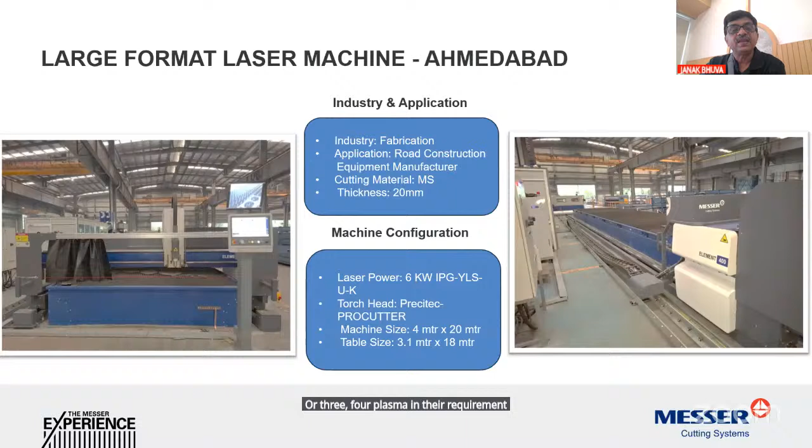Another example is BEC Bhilai, where they use both applications in one machine. Here they use a 1 kilowatt laser. We supplied this machine around 4 years back. The purpose was to cut small holes in very low thickness, which plasma cannot do well because plasma has limitations cutting good quality holes in lower thickness, less than plate thickness.

They cannot achieve good quality holes in lower thickness with plasma. So here they use the 1 kilowatt laser power source to cut the holes, and immediately after cutting, for the bigger profile on the plate, they use the plasma, because they find plasma faster and more efficient for that. That's why we call this a combo machine, where one laser and one plasma sit on the same gantry.

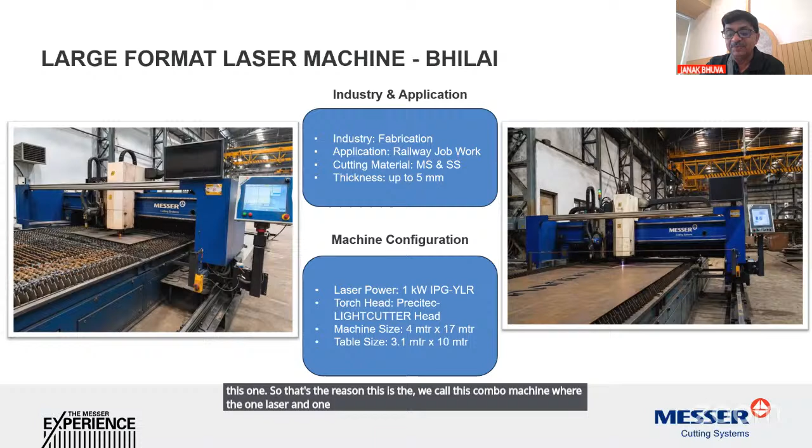If you go to the Bhilai industry, the second machine, they are producing the railway bogie frame and loco shells, cutting say 12mm, and they are using the 3 kilowatt IPG power source with the 3.1 by 8 meter single table machine. This particular customer also has a plasma of ours, 260 amperes.

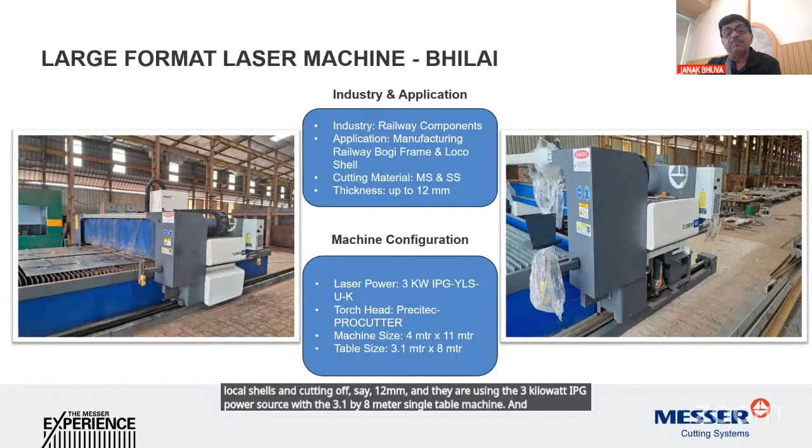This is the large format machine. This is a job shop, and particularly when people have a job shop, they have a variety of cutting thicknesses coming in. So sometimes if you buy any capacity of machine, the next day the customer comes with some extra capacity requirement. So this customer has plasma as well as laser to serve their customers.

And laser they use for the typical requirement of their customer, and plasma they use for this one. So I mean to say that plasma or laser is today's requirement. Both are necessary for the fabrication industry, and most of our customers or clients have both processes, depending on their requirement.

We have some cases after using 5-6 laser machines over maybe 4-5 years, and today we sold one machine recently in Rajkot. They are using 6 Amada machines, and now they wanted the plasma machine. You can see that everybody is adopting plasma and laser. Here the laser they were using for 6 years, and then they bought the plasma machine to meet their requirement for higher thickness and other applications.

Here is another large format machine at Polyhouse Chennai. They are the yellow goods supplier for JCB and other Japanese clients, and they have two machines actually. This is the first one they procured, and after that they procured a second machine also, for 6 kilowatt, and they are using this laser cutting machine.

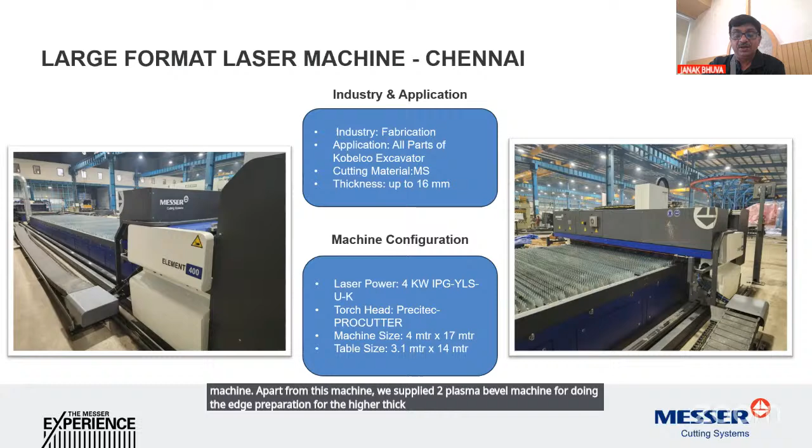This is another machine at Raipur, recently supplied. It's a 30 kilowatt laser cutting machine, for Apollo Tubes in the PEB sector, and they are going to produce PEB for the industrial segment. So we have supplied 2 machines there, and the length for this machine is 32 meters, so they can accommodate 2 plates in this one.

And also we have supplied this customer, surprisingly, an Oxyfuel machine for cutting higher thickness, say 40mm and above, for strip cutting.

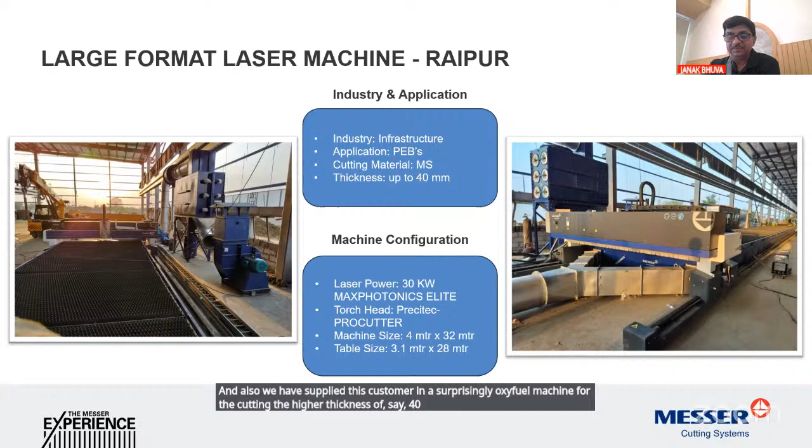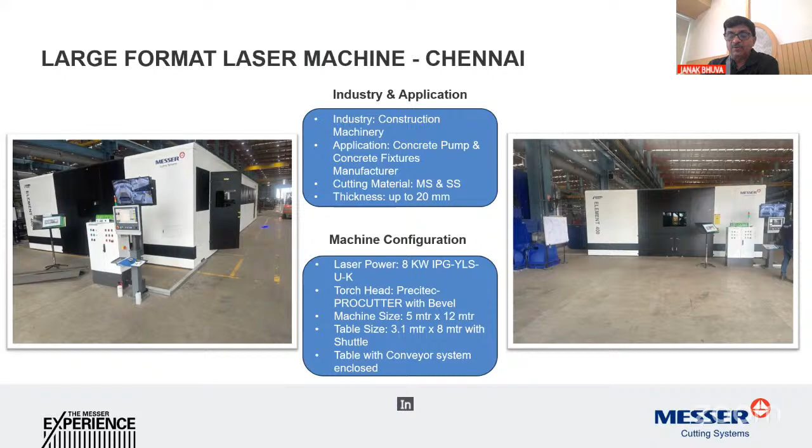And after this machine, they again procured 1 plasma machine. So as I said, it depends on your application, depends on your job mix, or depends on your product requirement in your shop floor. People are choosing the plasma, so you have to choose, or make an informed decision while making these decisions.

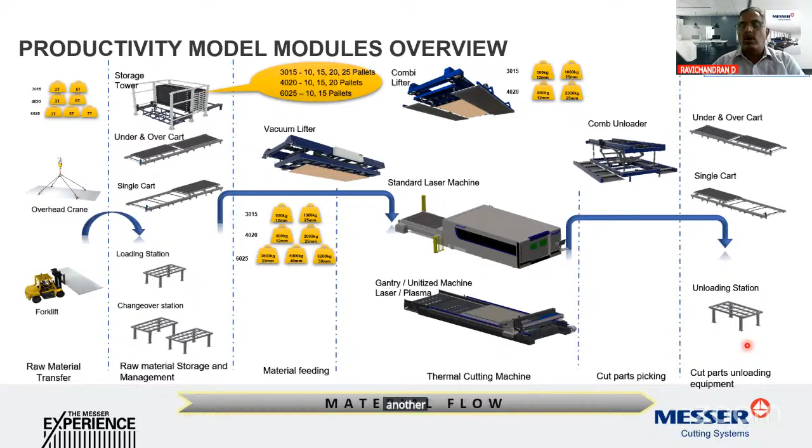We can have intermediate storage parts, and from there we can pick up the plate using a vacuum lifter and load it on the machine. After it's cut, the cut parts are scooped at one go and dropped onto another place where you can do the sorting. We also have sorting machines which can automatically sort it.

We also have a single machine, like a 3015 or 4020 size, a compact one typically for one machine application, which occupies very little space. You have one operator, you put a bundle of plates, you don't need another helper to feed the plates, and this will help you utilize your machine 24/7.

This is a big installation which is being done, which is completed.

This has got 3 laser machines of 6.5 meters by 2.5 and 2 plasma machines which are cutting 7.5 meters by 2.5 meters. We have a tower system where the plates are stocked for one shift, and from there automatically the plates are fed to the system.

Two operators handling all these machines. We have got 2 female operators, 1 for the 2 plasma machines and 1 for the laser machines. That's how the customer uses it. The schedule is done and the whole system runs automatically.

The operator is there to monitor, and when the system tells them to change the consumables, they change it. Or if there is any small troubleshooting to be done, only then do they get into the working area. So it's 100% automated, and because of that the machine runs 24/7. There is no idle time, no waiting for the plate to be loaded.